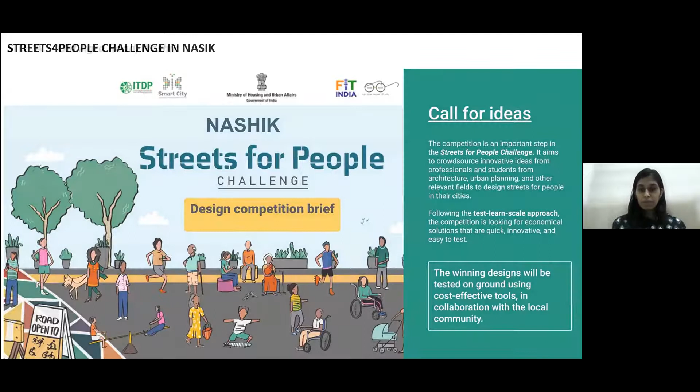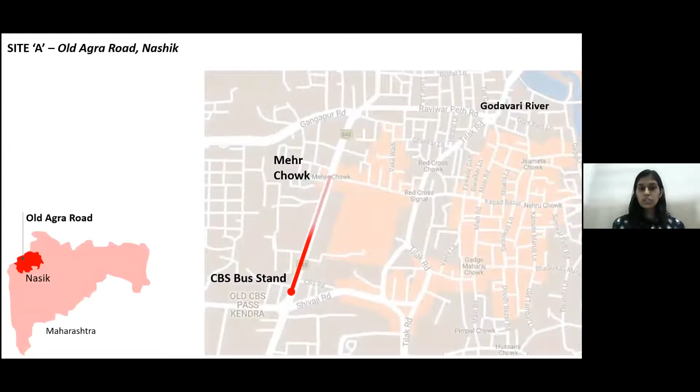The Nashik brief mentioned two sites, Site A and Site B, for the pilot intervention. We put forth our design proposal for Site A, which is a part of the old Agra Road in Nashik. As you can see here, the old Agra Road lies in the old city of Nashik, and it leads on to the Godavari River in the north.

The site chosen for the pilot intervention stretches from the CBS bus stand in the south to the Mehr Chowk in the north. What's important here is that this particular stretch of the road has been recently revamped by the Nashik Smart City Mission in terms of its physical infrastructure.

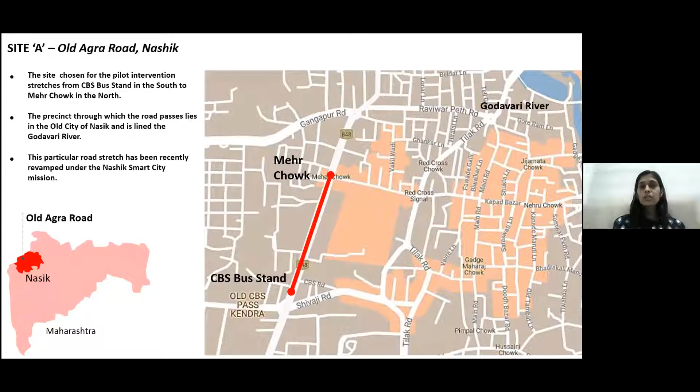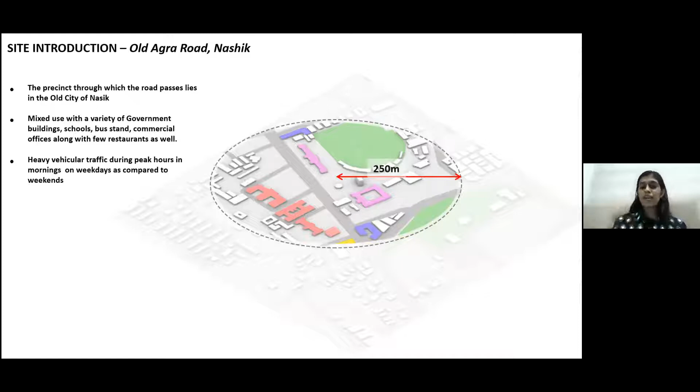Talking about the overall context of the site within a 500-meter distance, the character of the site is of mixed use. There is a variety of government buildings, schools, commercial offices and restaurants. There is also a presence of a city bus stand, the CBS bus stand.

In terms of vehicular traffic, during the day on weekdays there is heavy vehicular traffic due to the government buildings, offices, commercial offices, and restaurants, as compared to the weekends.

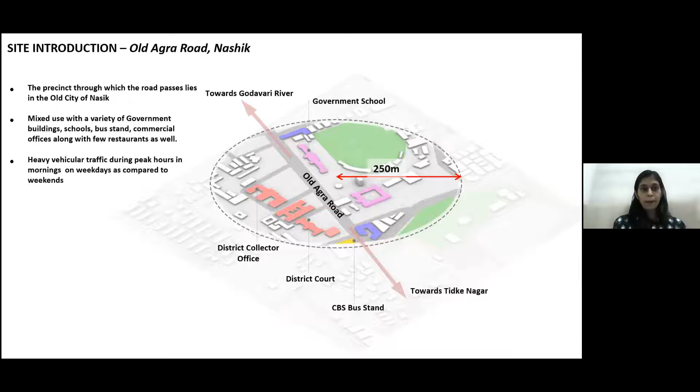After the walking audit was done, we documented the site at three different times of the day, and we drew a qualitative analysis based on it. Pedestrian and vehicular movements were the highest during the week.

Pedestrian and vehicular movements were highest during the peak hours, while the road was vacant in the morning and at night. We also noticed various activities happening at different times of the day.

With respect to the physical context, we concluded that the 5-meter width of the road was underutilized, and there were currently very little ancillary functions happening on the footpaths according to the physical context, such as school and court, etc.

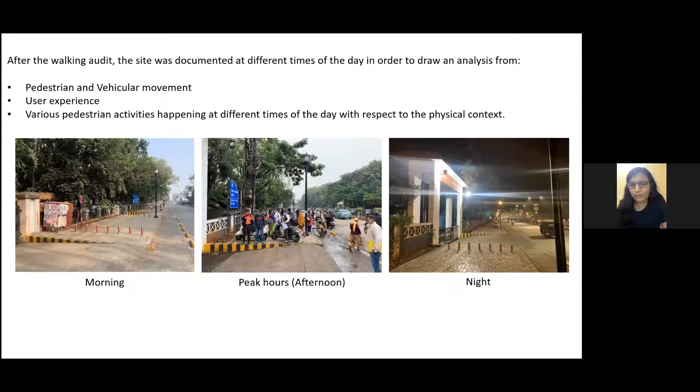Next, we identified a few issues on the site, and we sorted these issues into various different junctions on site. I'll walk you through them. This was the first junction we identified, near Mehr Junction, where the girls' high school footpath is.

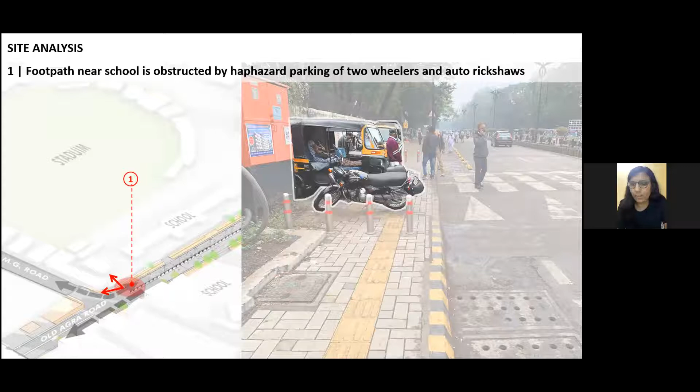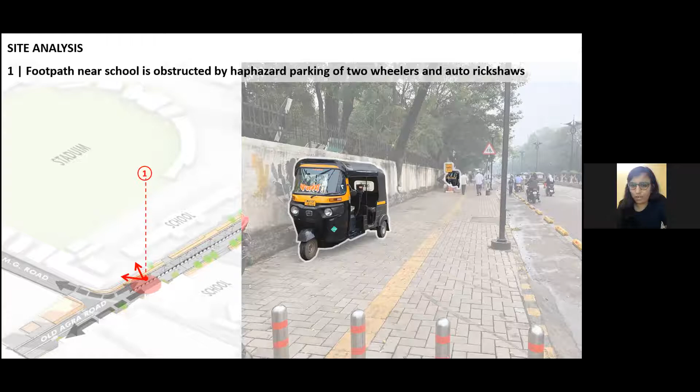Due to presence of the speed table at the junction, two-wheelers and auto rickshaws tend to park on the footpath itself, making it very inconvenient for users, including school children, to use it for crossing, etc. This is the section shown in the next slide.

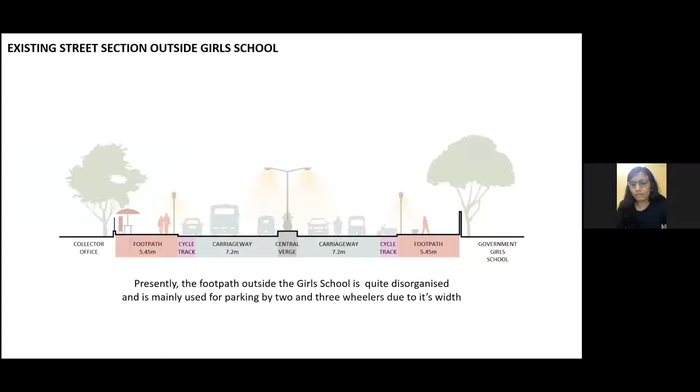This is the section showing the same junction, where the width of the footpath is underused due to vehicular parking.

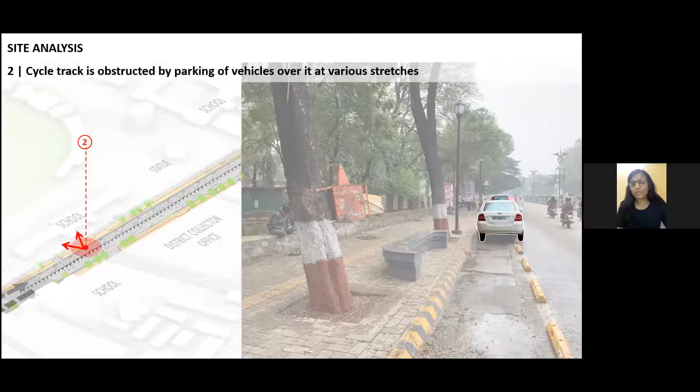We also observed that the cycle track throughout the stretch is currently used for four-wheeler parking, making it very inconvenient for cyclists to use it as a continuous cycle track.

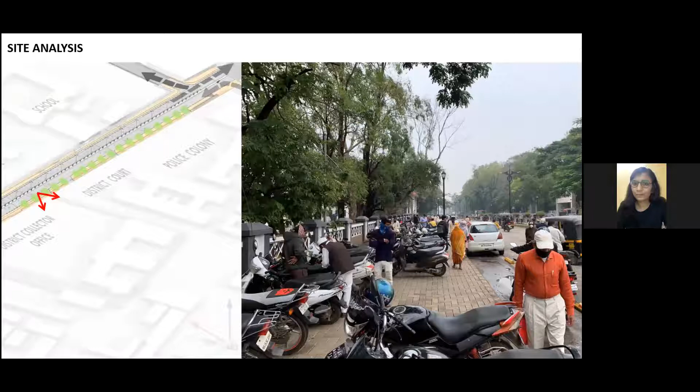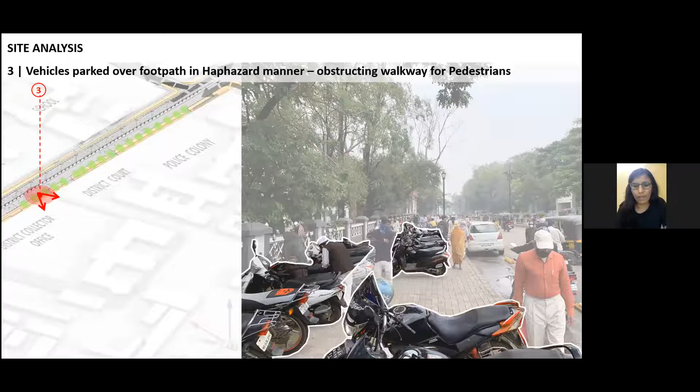On weekdays during the day, the area outside of the collector's office and district magistrate is predominantly crowded by visitors who prefer to park their vehicles on the footpath rather than parking inside the campus, which is paid parking.

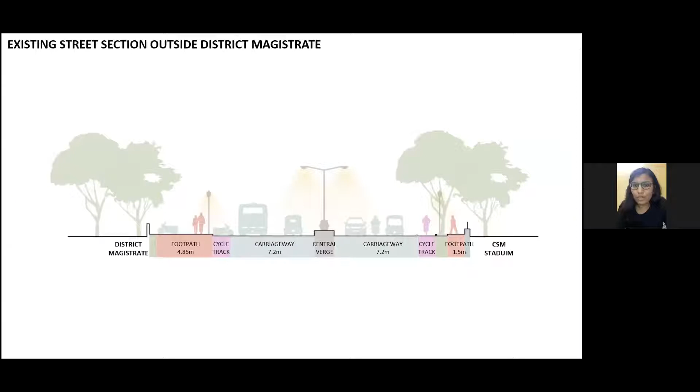Also, as you can see, the footpath area is very chaotic and creates obstruction for people to walk. In this existing section, you can see the district magistrate footpath.

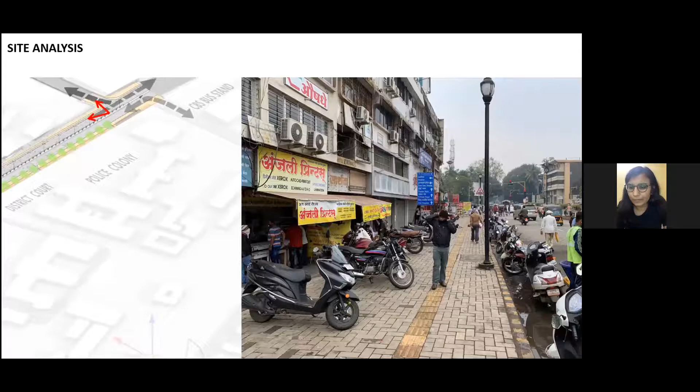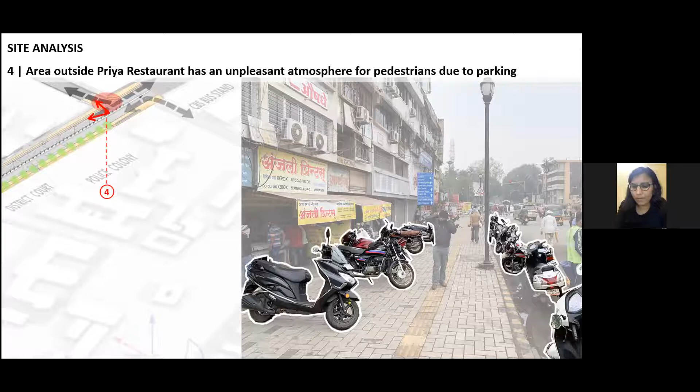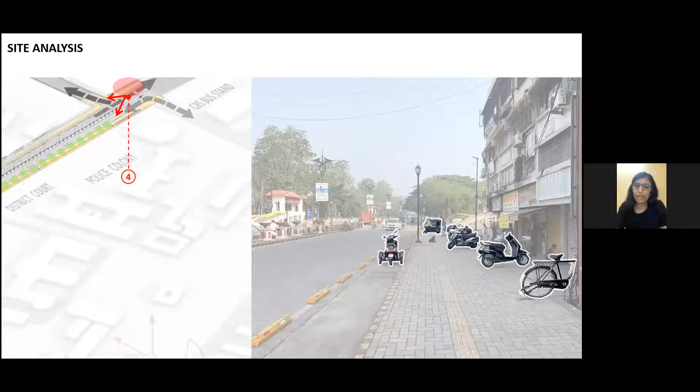This is the area outside of CBS Junction, outside of Hotel Priya. As you can see, the shops and hotel outside have a lot of two-wheelers parked, which creates a very unpleasant atmosphere for pedestrians to access the shops and leaves no room for allied activities. Hence, this zone is predominantly commercial, so it's better to have allied activities there, which are currently not existing.

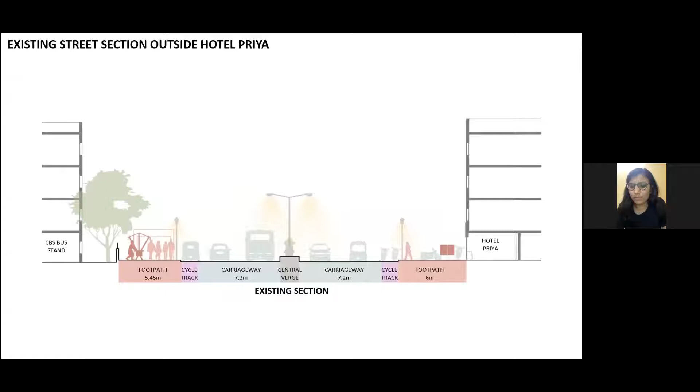In this section, you can see that more than half of the footpath space outside Hotel Priya is taken by two-wheelers, leaving very little space to walk.

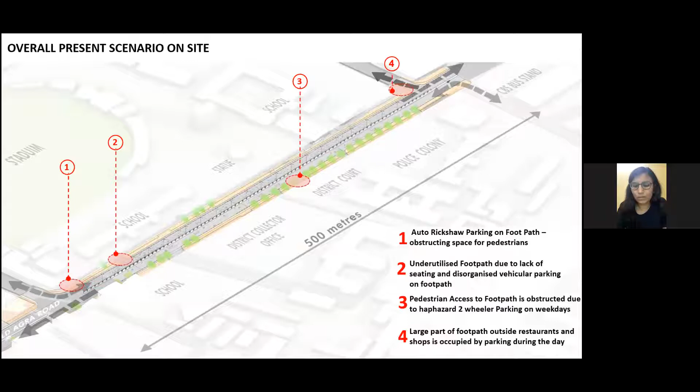These are the prevalent issues that we noticed on the site. There were also some other issues throughout the site, including poor accessibility of public toilets with very little visibility from the roadside and no handicapped access, disorganized informal kiosks and stalls spread throughout the footpath, aesthetically unappealing boundary walls, and four-wheeler parking in front of the bus stop.

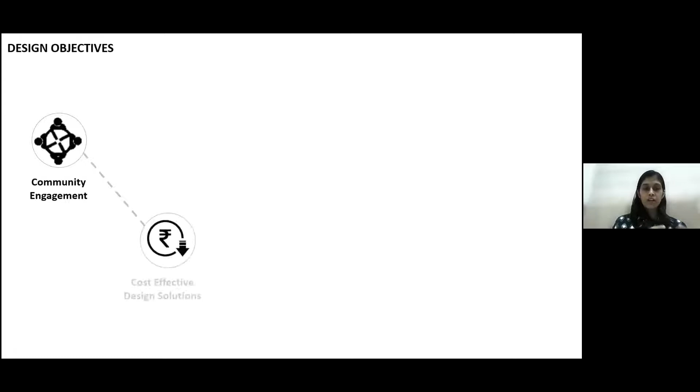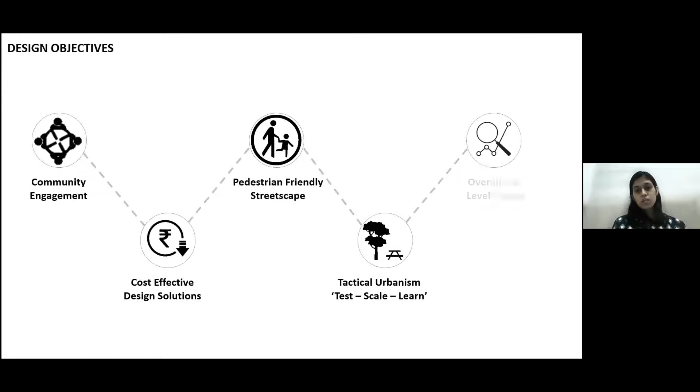Next was the design proposal for this particular stretch. The proposal aims at achieving certain objectives centered around community and its engagement. It employs cost-effective design tools to further activate this current road stretch and make it more pedestrian-friendly using tactical urbanism tools, and further on, to use the learnings from the trial process to create an overall impact in the city.

The design strategy was divided into two phases in terms of implementation. Phase 1 is the trial phase for testing the design strategies, which looks at community workshops, restricted parking, the use of soft infrastructure, and public outreach.

Phase 2 aims at a permanent weekend bazaar during the weekends on Sunday mornings, crowdfunding, and promoting heritage in the old city of Nasik in order to have a safer street.

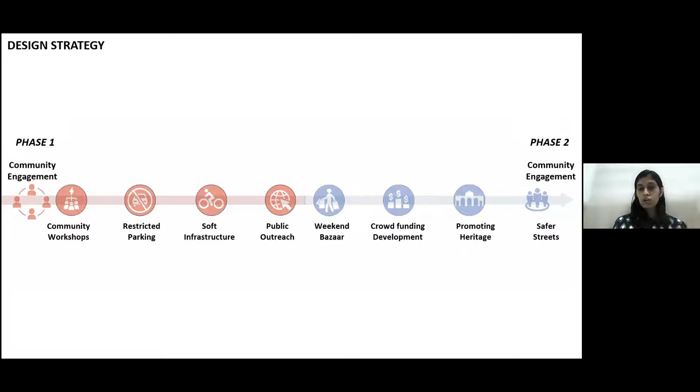Now, in order to achieve this, we proposed a few strategies.

Number one was the use of temporary street furniture in order to make the streets more lively. Next was the wall painting of compound walls, which could be done by the students and the community as a part of various public outreach programs.

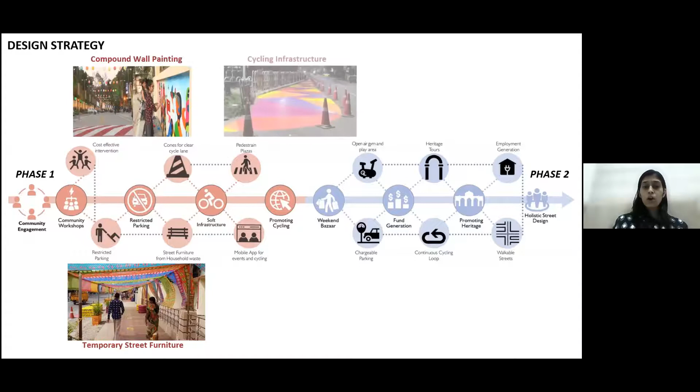In order to have a more efficient cycling infrastructure, we've proposed clear, defined cycle lanes using traffic cones, along with biking stations at regular intervals.

In the predominantly commercial zone, we've proposed pedestrian plazas to support pedestrian activities related to the shops and restaurants near the zone. Finally, defined lanes for both vehicular and pedestrian traffic movement is the aim.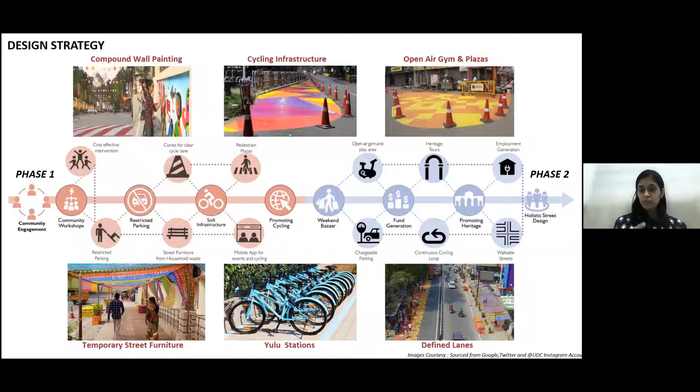Also, to further engage the community in the street design development, we employed the use of a public mobile application and a website portal that looks at the events and happenings on the street during weekdays and weekends, along with the integration of cycling.

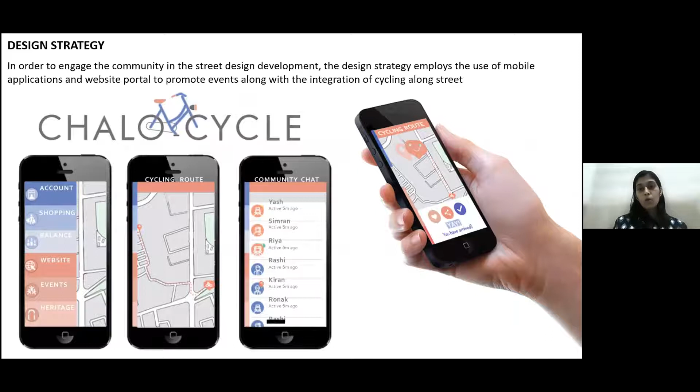The implementation process has been divided into two phases. We have designed an urban toolkit for street furniture, devised to create low-cost, effective solutions. This has been done to activate the street by curbing the parking of two-wheelers and three-wheelers and introducing pedestrian activities.

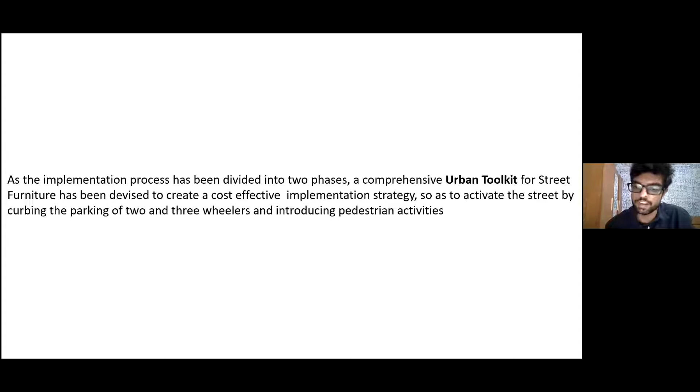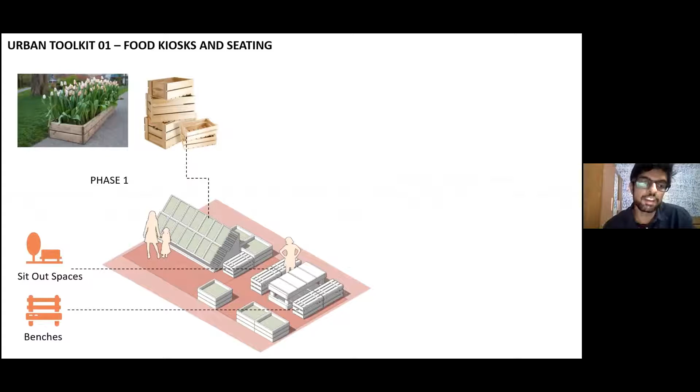Talking about the first toolkit, we designed food kiosks and seating areas. In the first phase, we have proposed to invite local residents to donate their fruit crates and other household waste in order to design open seating and market display areas. In the second phase, this will be converted into a more permanent solution, such as a permanent kiosk with a covered, shaded area.

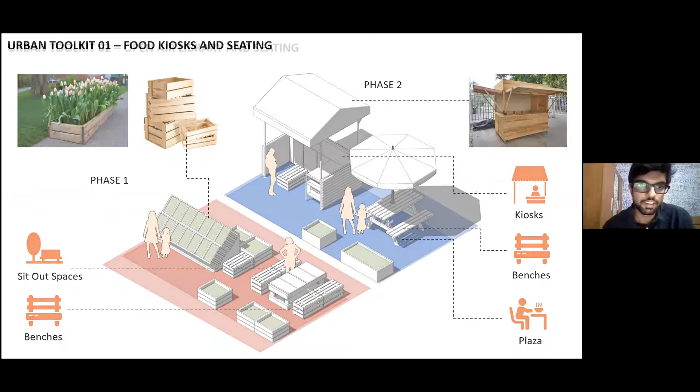The second toolkit talks about an open library space.

Just a second, I think something is missing.

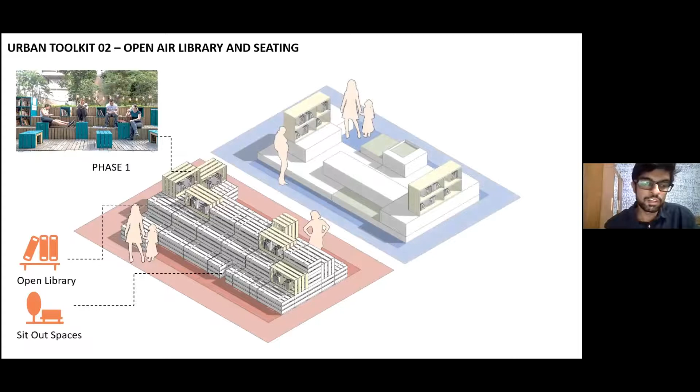In the first phase of this toolkit, we have designed an open amphitheater seating combined with an open street library, integrated as part of the seating with household waste crates. In the second phase, this will be converted into a more permanent solution using concrete materials and an organized open library area.

Now, the third toolkit is one in which we've designed children's play equipment.

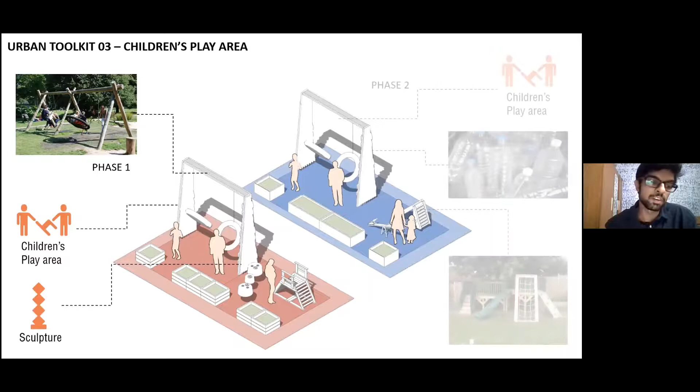In this phase, we have designed an open amphitheater and temporary children's play equipment such as swings and slides using refurbished materials like waste tires, bamboos, and waste bottles. In the second phase, this will be converted into a more permanent solution using materials such as metal and wood.

Talking about the fourth toolkit, we have designed an exhibition space. In the first phase, we have designed an open art display area, which will showcase the talent of local children and local artists outside the government girls' high school, along with Yulu cycle sharing stations.

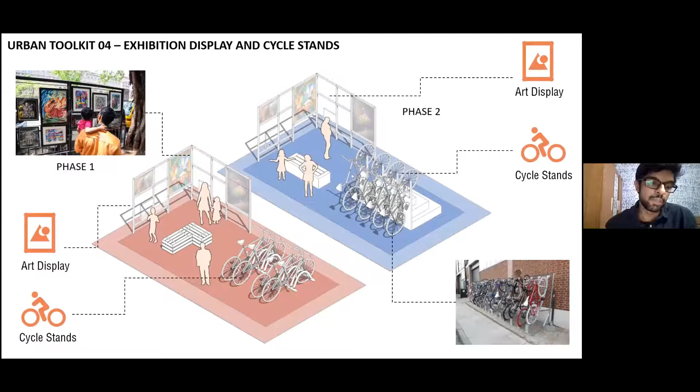In the second phase, this will be converted into a more permanent solution, and the cycle stand would be redesigned along with the seating area.

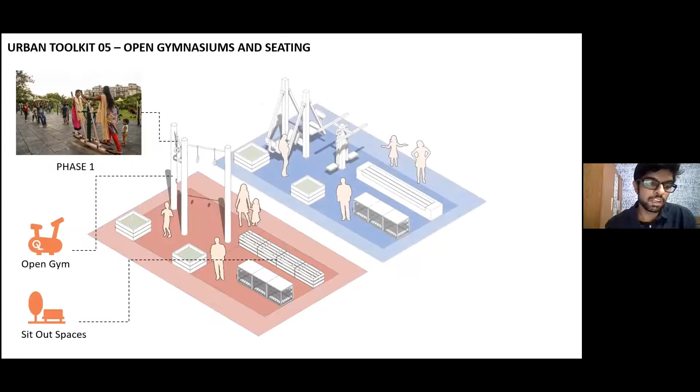The fifth toolkit, we have designed open gymnasiums. In the first phase, we have designed a temporary open gymnasium and seating using very simple design methods. In the second phase, this will be converted into a more advanced open gym equipment of a more permanent nature.

Talking about the sixth toolkit, we have designed an entrance junction detail, outside the district magistrate office on our stretch. In the first phase, we have designed crate planters at the entrance to avoid two-wheeler parking on the footpath while allowing pedestrian movement across the footpath, along with disabled-friendly access.

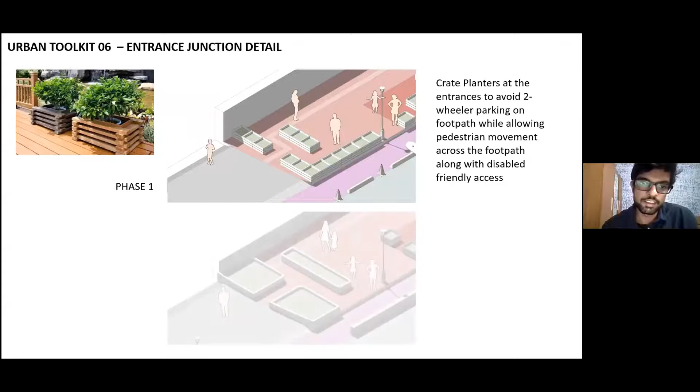In the second phase, this will be converted into a more permanent solution by designing RCC planters constructed in order to avoid two-wheeler parking and allow pedestrian movement.

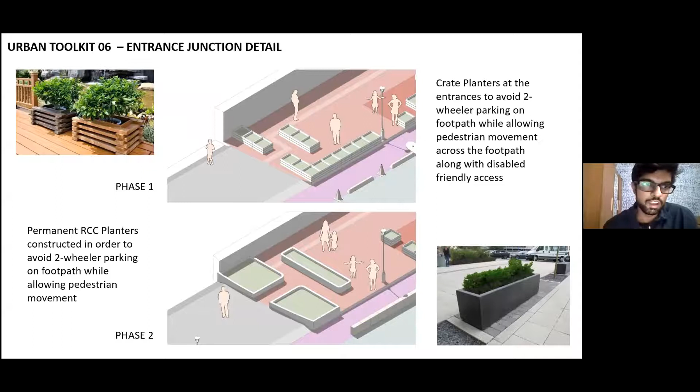Considering this entire site context and its impact on pedestrian movement, we have designed a zoning plan formulated to make the street more pedestrian-friendly and walkable.

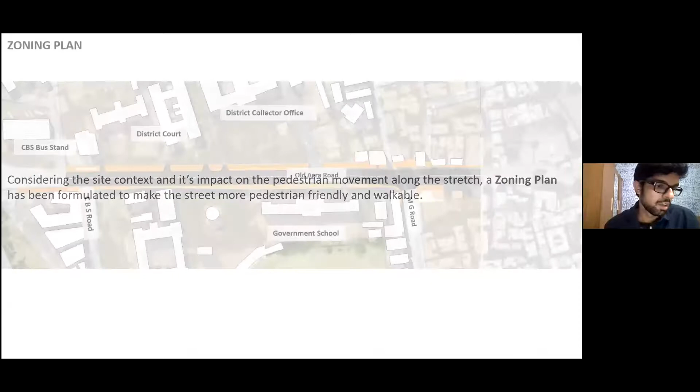Looking at the overall context, the side of the road outside the government girls' high school remains inactive in the morning on weekends, and hence we have converted this site into a happy street on weekends, which will house various public events for the local residents.

These were the zones of intervention where we decided to intervene. They start with the area outside the government girls' high school and the district collector's office, the area outside the district court, and the area outside the CBS bus stand.

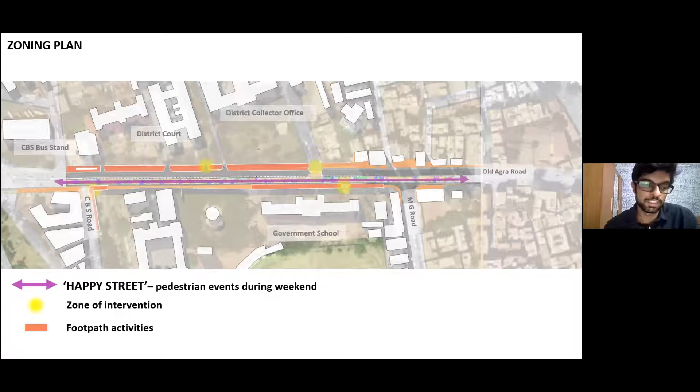Finally, looking at the footpath activities, we have designed the footpath with the various elements from the urban toolkit, keeping in mind the conditions of the different zones.

Moving on to Devendra. Now going into the details of the three zones on the site. Zone 1 is the Government Girls High School and District Collector's Office.

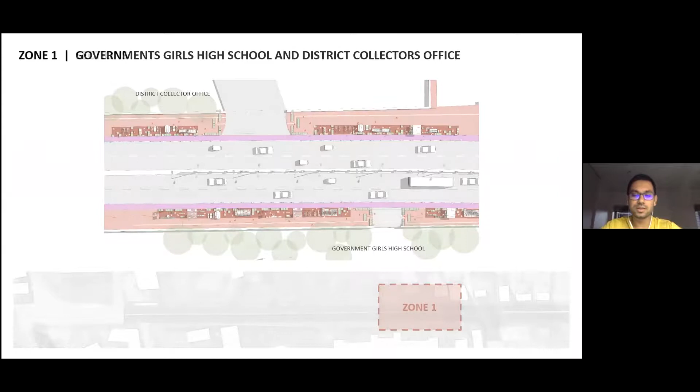This area has wide footpaths on both sides, which are underutilized and have become parking spots for two-wheelers and rickshaws. Hence, to activate the footpaths, we have divided the footpath into two parts: the activity zone and the pedestrian zone.

Outside the district collector's office, we have proposed makeshift kiosks and seating to promote the micro-economy in the area. Outside the school, we have proposed temporary seating with an open library, play areas, and exhibition stands.

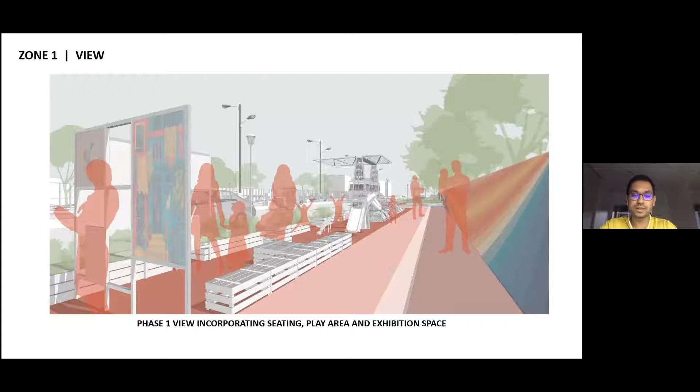We also intend to launch a community-based competition for murals, wall art, sculptures, and installations in the area. This is how we envision the area outside the school, incorporating exhibition space, seating, and play areas using temporary materials. Depending on feedback from the local community and authorities, these interventions could be made permanent later on.

These are some of the tactical urbanism references we looked at for the play area and the wall art.

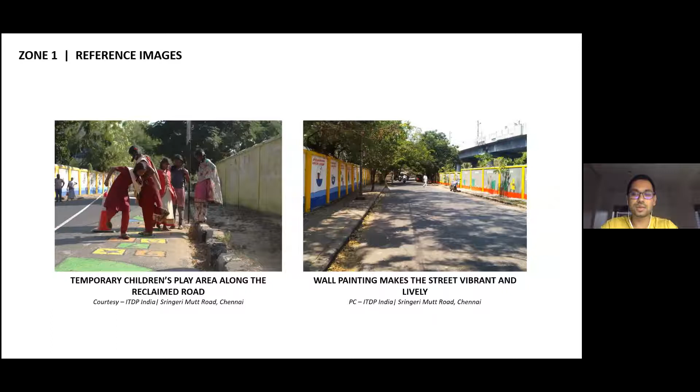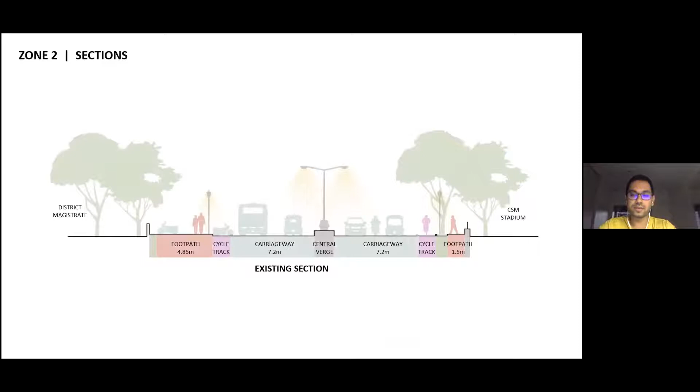Going to the next zone, which is the area outside the District Magistrate and the Chhatrapati Shivaji Maharaj Stadium. The footpath on the District Magistrate side is quite wide. However, the footpath on the stadium side is only 1.5 meters wide, with various trees lined along it, and the compound wall of the stadium is broken at multiple places.

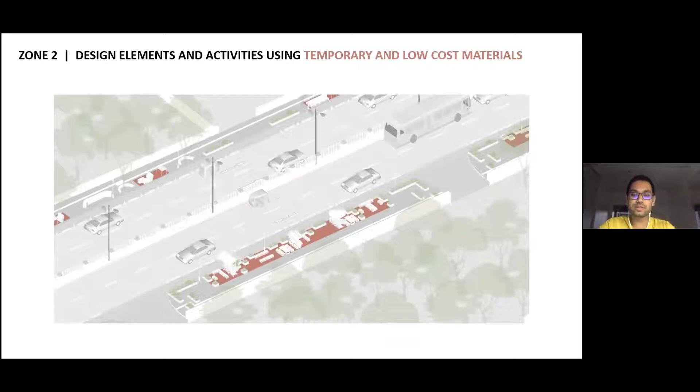Hence, to activate that space, we have introduced an open gym and furniture made during community events, which would be placed between the trees. Also, the broken compound wall will be converted into seating benches.

The footpath next to the district magistrate office is mostly used for two-wheeler parking, as people want to avoid the paid parking facility available inside the campus. This creates chaos on the footpath and doesn't allow enough space for pedestrians to walk or even sit on the existing benches. This happens because the footpath is quite wide and easily accessible to two-wheelers.

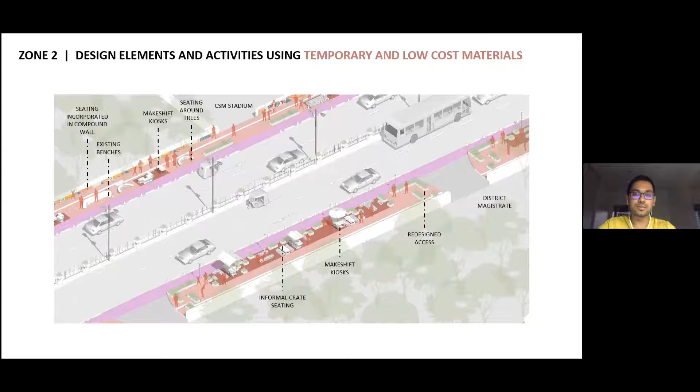To cater to the footpath, keeping in mind the movement of pedestrians and differently abled people, some makeshift kiosks are also proposed for people coming to the district magistrate office.

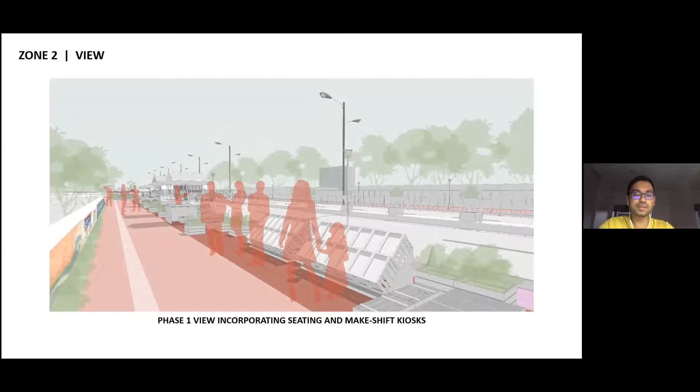This is how we envision the first phase of the area outside the district magistrate office to look like. Depending on the feedback, we will be making a more permanent intervention in the second phase.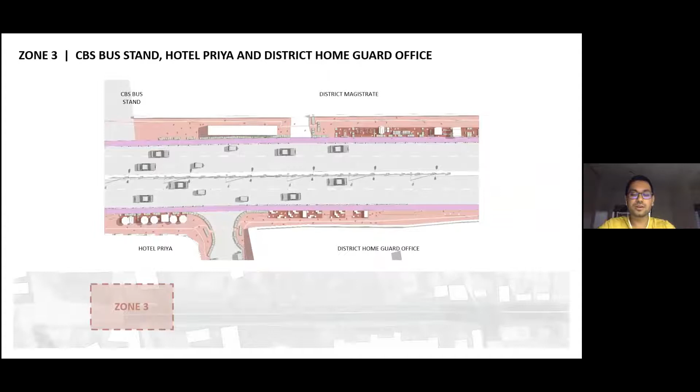Being next to the junction, there is a lot of vehicular and pedestrian movement here. The footpath and the cycle track outside Hotel Priya are completely blocked with two-wheelers and rickshaws, creating a movement problem for pedestrians and cyclists alike.

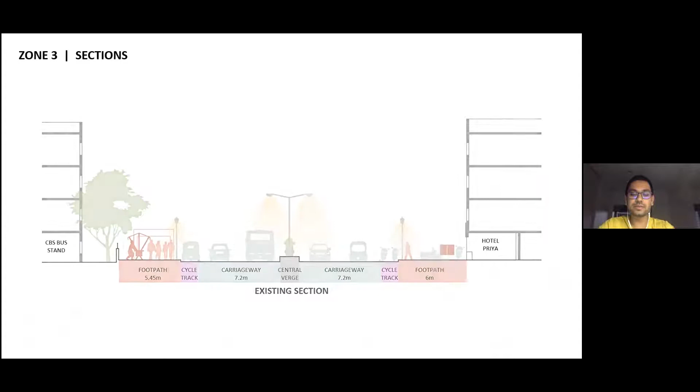Thus, to cater to this problem, we have introduced a bulb-out in the by-lane, making it easier for pedestrians to cross while shifting the parking into the by-lane.

Also, the footpath outside Hotel Priya has been divided into two zones: one is the pedestrian zone and the other is the food plaza, wherein we have incorporated shaded seating and kiosks.

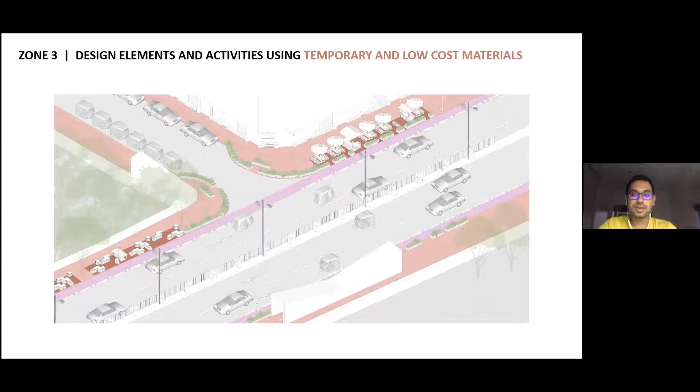The area outside the subway has been cleared by shifting the hawkers into the bus stand next to it. We also propose that the subway be painted by local artists and community members to make it more aesthetically pleasing.

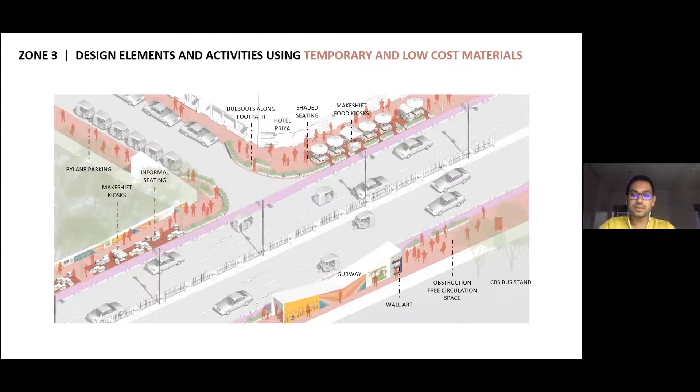Going to the views, this is how we envision the first phase of the food plaza to look like. Once the trial is completed, we can make it permanent by adding more permanent furniture.

Coming to the references of tactical urbanism for the bulb-out and the shaded seating and shaded footpath outside Hotel Priya.

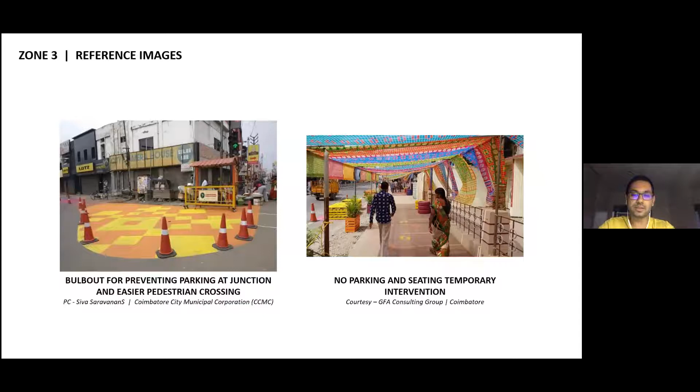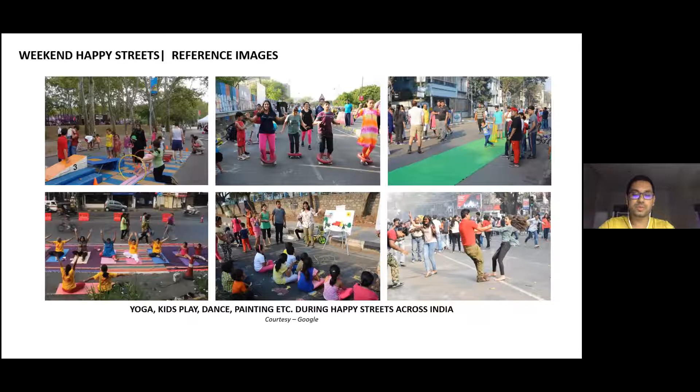This street was earlier used to conduct happy streets on Sundays. Hence, we propose to restart the same on the side of the school, which remains relatively empty during the early hours of the day, so people from different backgrounds and age groups can come together and enjoy the space.

Over to Meghna. Yeah.

After the design submission, a total of three entries were shortlisted for the community voting round. This was done to engage the community in the street design process.

A Google form was circulated amongst the community with the presentation of the design proposal for the shortlisted entries. Having won the competition and received the most votes from the community, we then got into dialogue with the authorities at the Smart City Corporation and were asked to submit our design drawings for feasibility analysis.

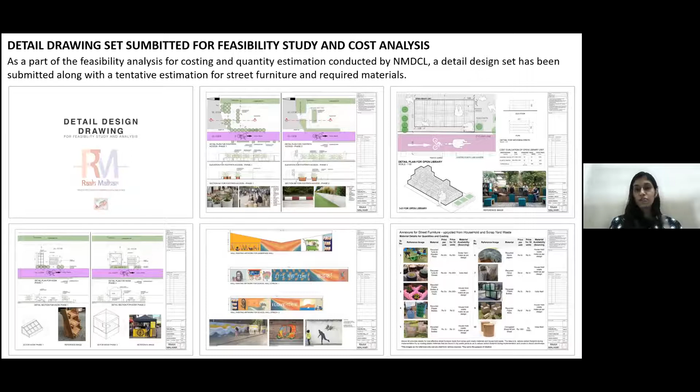The drawings containing details of the street furniture design, along with a tentative costing estimate, have been submitted by us, and the feasibility analysis is currently underway. Unfortunately, due to the surge in COVID-19 cases in Maharashtra, not much progress has been made and currently the process has stagnated. However, we look forward to getting in touch with the authorities again and taking this project further in terms of implementation.

This was our conceptual design proposal for revamping the old Agra Road in Nashik. We hope you liked this presentation. And once again, thank you, Placemaking India, for this opportunity. Thank you, everyone. Thank you to the team.

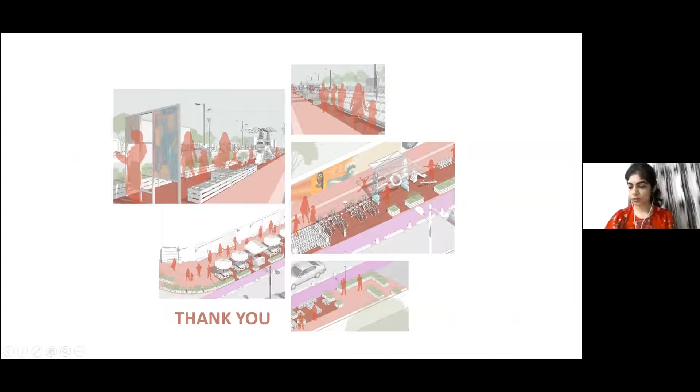So we'll begin with my first question: what was your response to the building uses while designing the street right outside? We're looking at public buildings, schools, one end with the transport node at the CBS junction and bus stand, and the other with a few commercial buildings. So what was your response to the area outside in terms of building use? And I'd like to add a related question: public buildings have a different sort of parking issue because of the floating population. So how did you document it, and how did you translate that into your design? The response to the building use and then the parking problem.

Okay, I'd like to take the first part of the question. As mentioned during our presentation, there was a walking audit organized by the Smart City Corporation in Nashik, wherein they strategically addressed a few issues they were facing during design development of this street, which were pointed out to us, and they requested us to address these in our design proposal. Which is why we structured our proposal as a zoning plan, where we identified the zones of intervention.